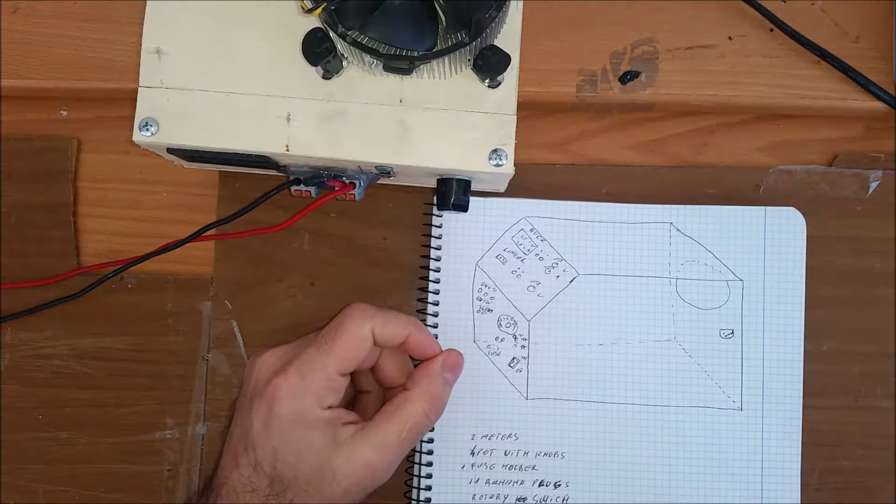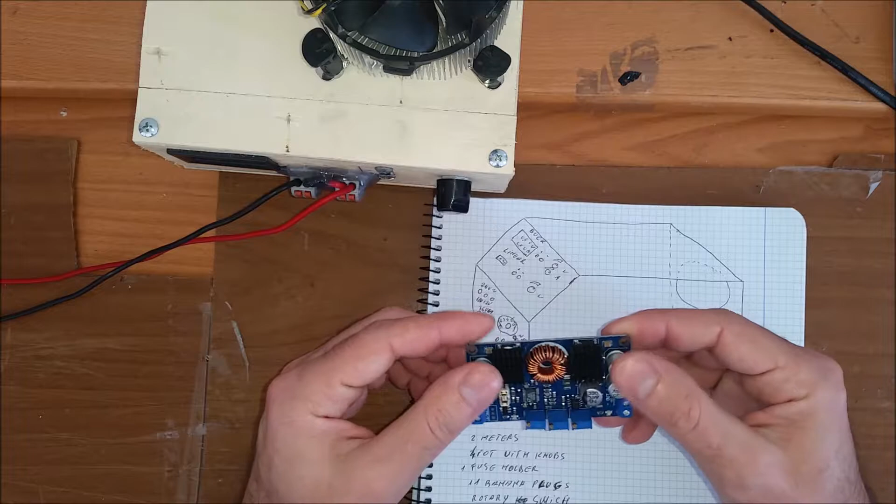It's a bench power supply. This came because I kind of poorly designed this one here, and after that I just bought a buck converter, a step-down step-up buck converter, which will be this one. This is rated at up to 10 amps and continuously 8 amps, so I'm going to include that into my power supply.

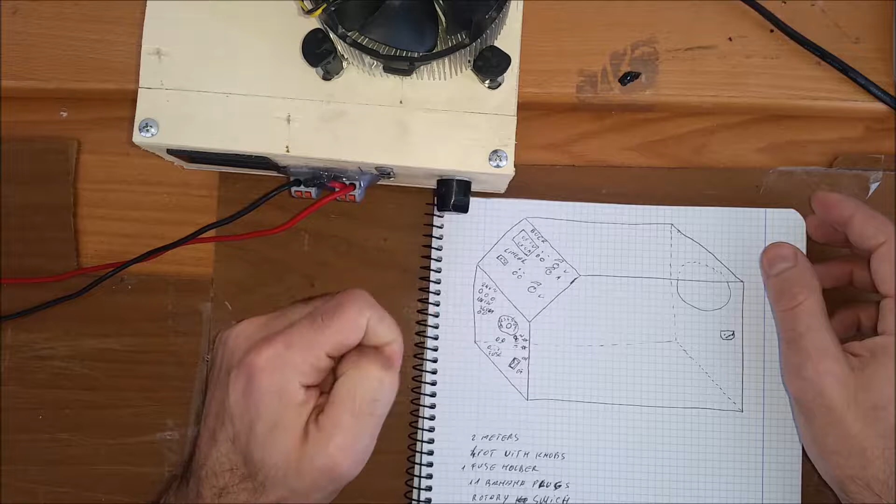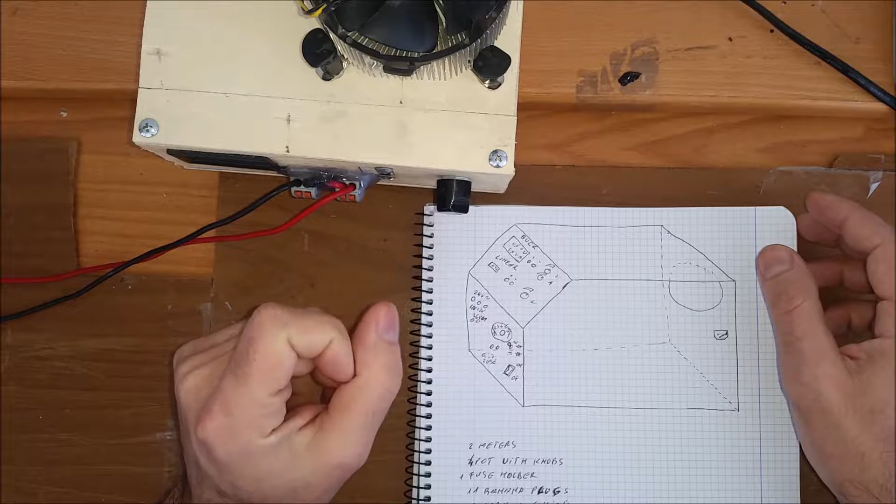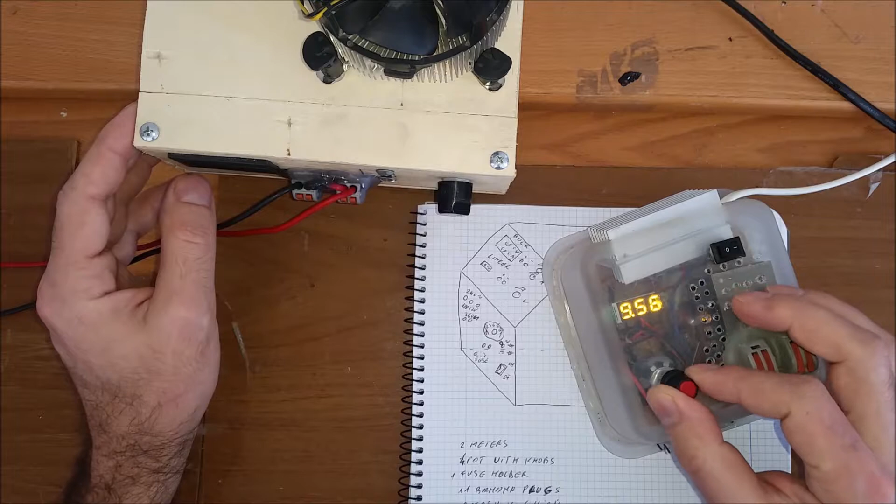And what I'm gonna do more is include a linear power supply and alternating current, or volts, how you want to say it, plug. Now today I'm gonna start by designing the enclosure, because I have more power supplies here. For example, this one, which is a simple LM317 based power supply, and this has the meter on the top part, so I can see this very easily.

Now the other one, which is more powerful, has it at the side, because I've seen people use this type of enclosure for their projects. But this is actually a bad enclosure, because the meter here is under my angle of view, and I always need to bend down to see the values. So if you don't have it on a shelf, on the same line of view as your eyes, this is a bad design for me because I always have this on the table.

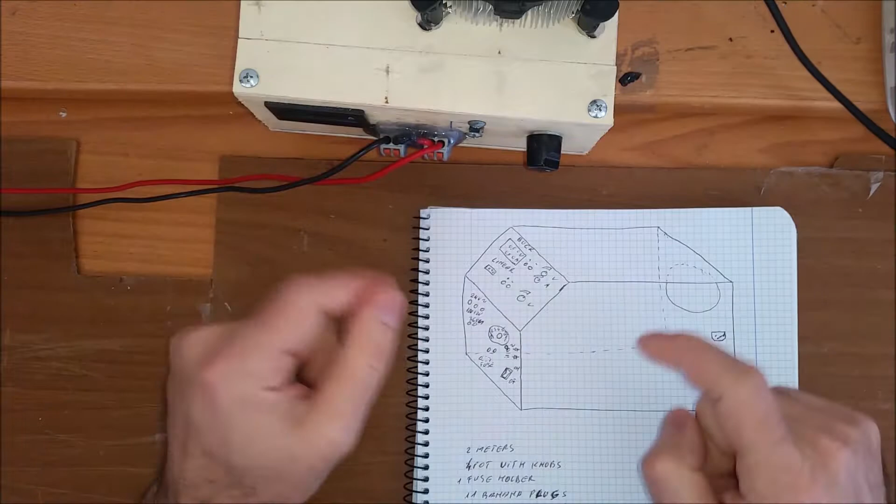More bad design than this is because I made a mistake when I put the power transistor on a simple heatsink, and that simply didn't do the job. And when I put this PC heatsink, I just didn't have enough space in the enclosure, so I put it on the outside. So today I'm going to design an enclosure like this.

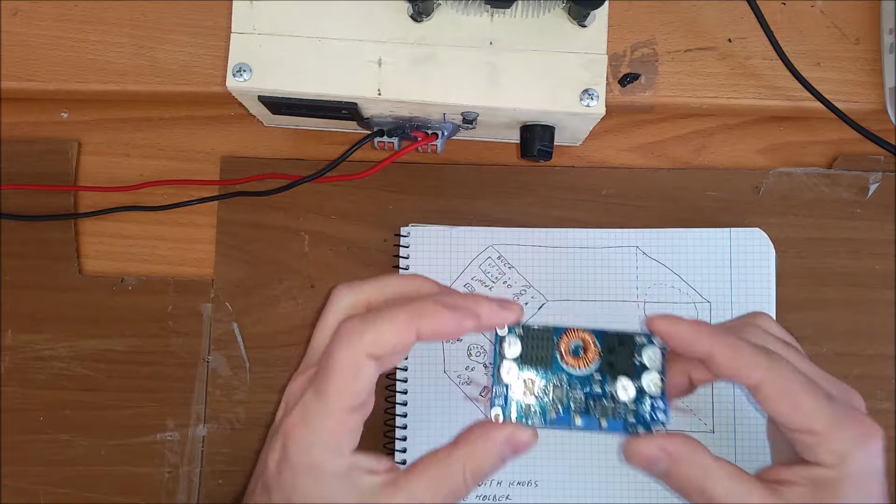I have it designed. I'm just going to take some measurements so I can fit inside the toroidal transformer and the heatsink for the transistor, because I want to put inside this enclosure a buck converter like this, a linear power supply, and a few more features, like 12/24 volts AC, 12/24 DC, 30-something volts AC, and a few alternating current plugs that I have on the transformer rewired.

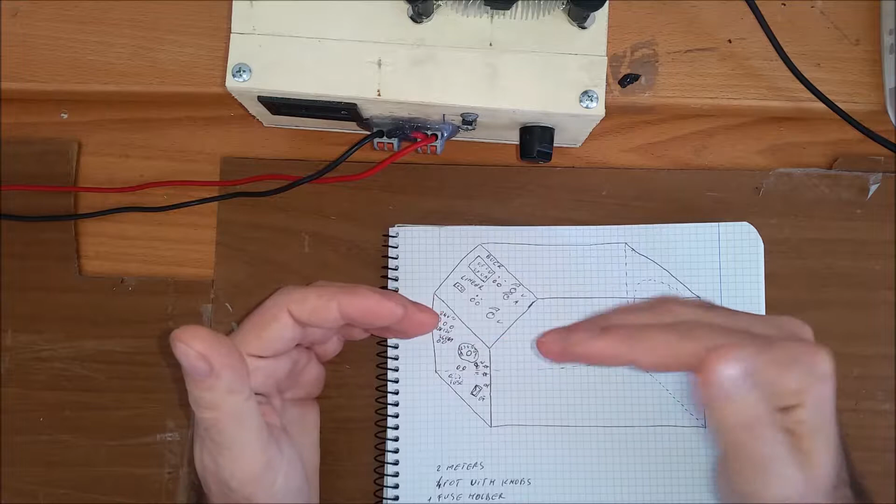So today I'm going to start with the enclosure, and after that I'm going to go from there. Now the enclosure, how I design it, will not be square like this. It will be like a tower, more tall than wide. And the front panel will be from two pieces. First it will be straight down, and the part with the meters will be bent at an angle.

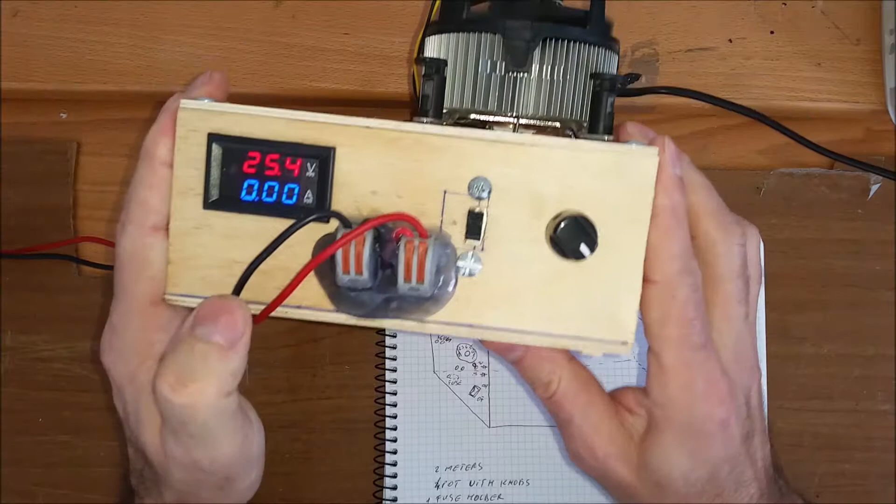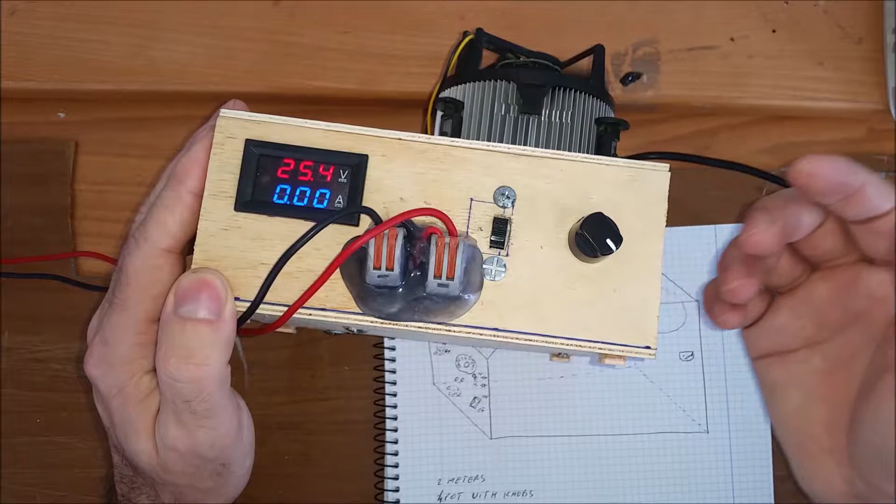That way, when the power supply is on the table, my angle of view will be straight on the gauge that measures my volts and amps, and I will have the knobs there. That way I will not need to bend down to see the values. If I want to shoot a video, you will not see it. For example, right now you will not see the values. I need to put it up like this, and I actually have a video where I put it up, because you don't see it in the camera, and I don't see it myself because it's under my angle of view.

So the front panel will be made from these two panels, and the back enclosure will be closed from the side. Just this side will go out, and I'll have the transformer here. Back here, the big fan with the heatsink will be on top of that, and all other things will be around the enclosure. I didn't think that through yet, so I'm gonna go ahead and start doing that.

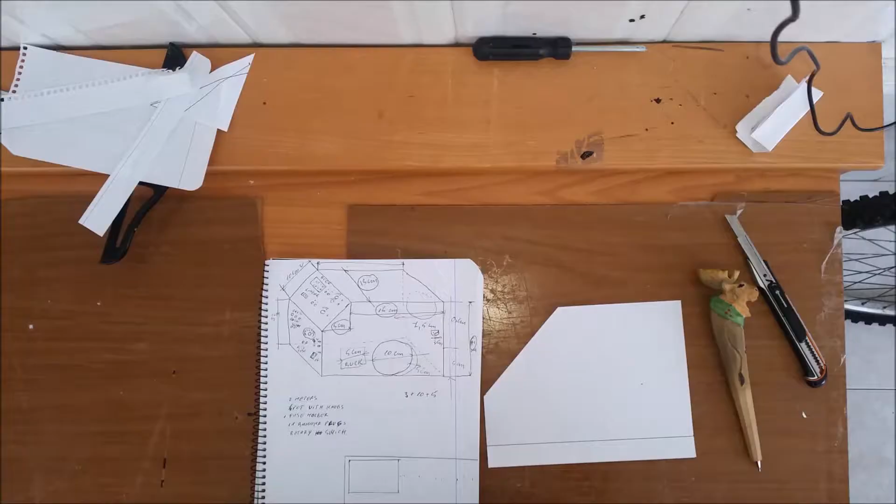Okay, so after some measurements, I end up with this shape, which will be the side of the bench power supply, like this, and it has the measurements. It's 20 by 15 centimeters by 13 wide. So I'm gonna take this right now, put it on the board and cut two plates for the sides.

Okay, so after some time, I have the enclosure. These are the sides, this is the bottom part, it will all be mounted. This is the back part of it. I cut all of this from a sheet of plywood with a coping saw, and here I started to cut the ventilation hole. This will be put in the back of the enclosure.

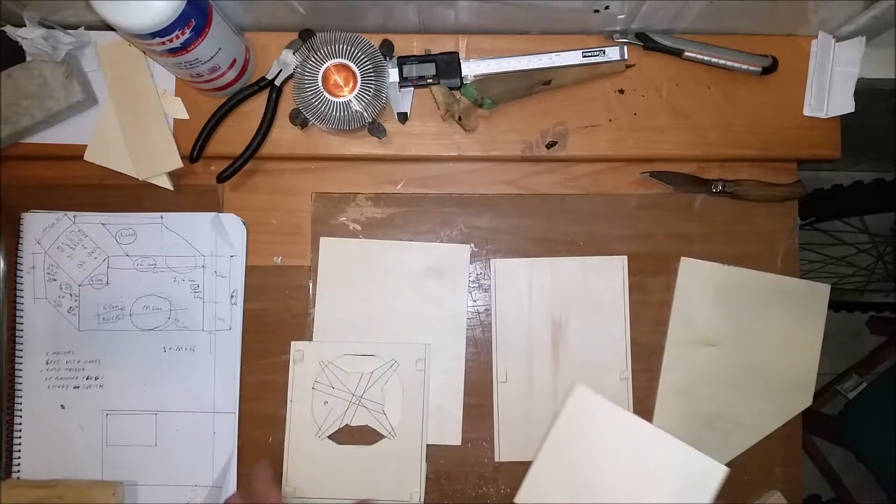This is the front panel, this one here, and this is the back panel, this one here. Okay, this is the front panel lower side, and it will be like this. Put it on, and over that will be this. And on this I'm gonna put the two meters and the knobs for the volts and amperes, and for the volts in case of the linear one.

When I glue this on like this, I'm going to put some kind of support between the lower part and this one here. That way I can take this out, this will stay on, and with the top out I will have full access inside the enclosure.

So yeah, I'm gonna finish what I started by cutting this piece here that was left. I just made a hole inside and with a coping saw I just traced some marks that I made before. I think from the back side it will look just nice.

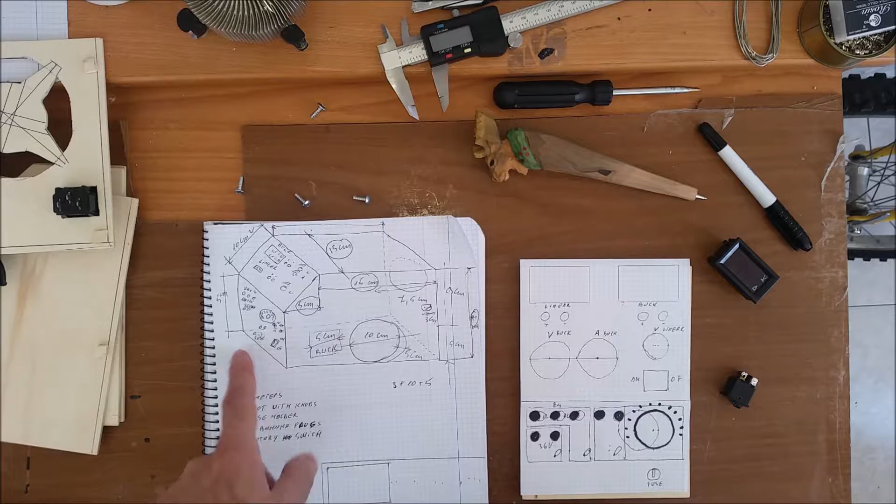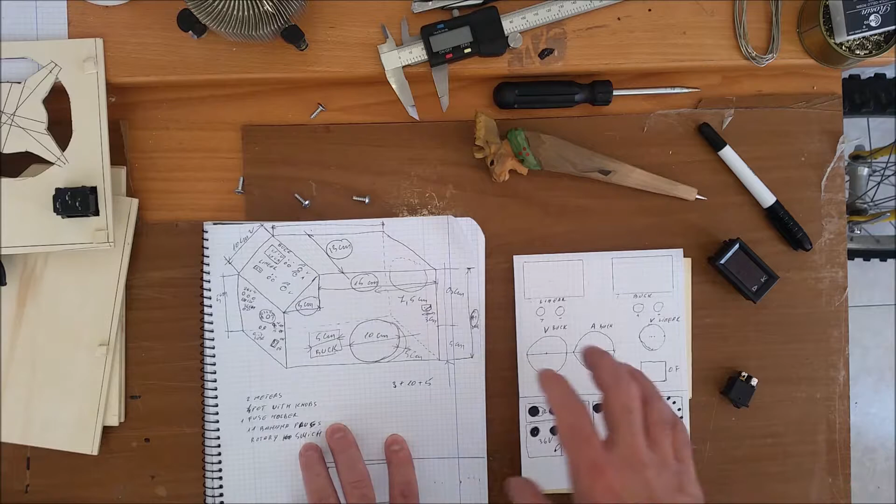So I finished cutting the back plate, which will support the fan for the linear and the plug. It's pretty awesome. And I started to draw the front panel of the power supply. Now, this was more orientative, and I kind of changed some things because these knobs here are very large. I didn't expect them to be that large, but it's okay. It fits on the front panel of the power supply.

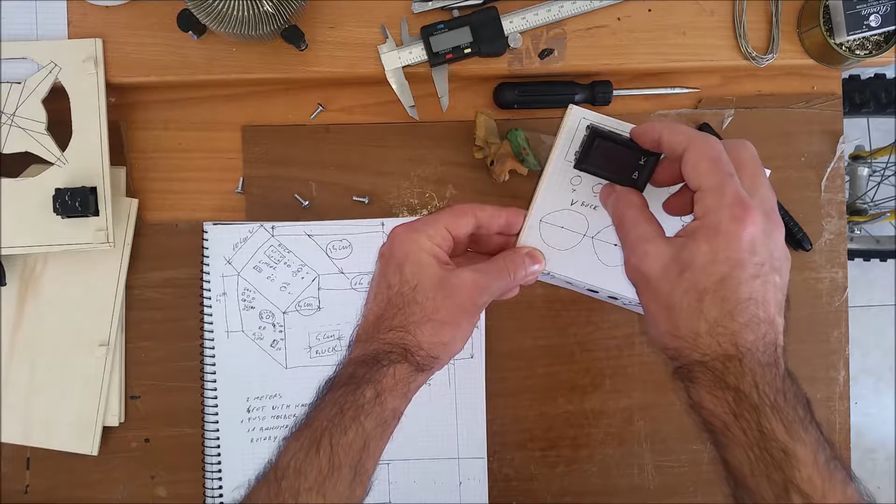This power supply will be at an angle like this. So on the top part I will have the 2 meters. I have this one, and the other one I just ordered from eBay. So this would be here for the buck, and the other one will be for the linear on the right side. After that there will be the banana plugs under this, and the volts adjust and current limit under that.

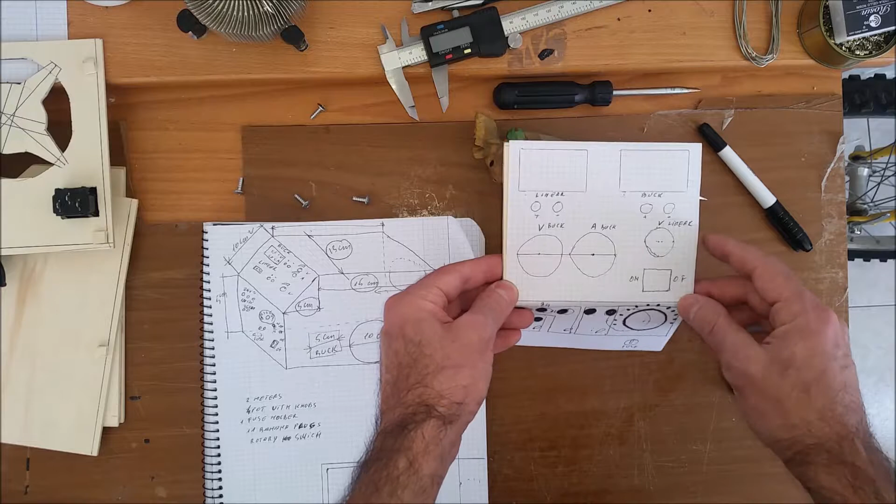And the linear supply, because it's just an LM317, I don't have current limit on it. I'm just going to put the knob that I already have on the other power bench, and 2 banana plugs. And on the lower part, it will be interesting. I decided to put a differential power supply, like 12, and 24 at the ends, with a common ground or common plus, however you want to say it.

And this, with the help of the switch I just put here, it will be 12 common, 12 alternative or minus 12 plus 12 continuous, depending on the switch that I put up or down, and pass it through a linear power supply that will be stabilized.

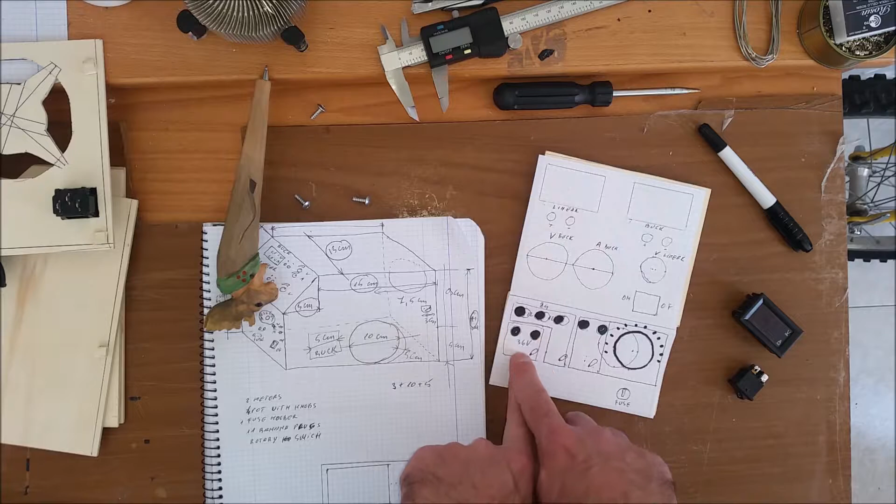Under that, I'm gonna put two more banana plugs that will be straight 36 volts alternative, that will come straight from the transformer. Practically the input that goes into the power supplies, I'm just gonna bring it outside. It will be 36 volts alternative. I put a switch here, alternative or continuous.

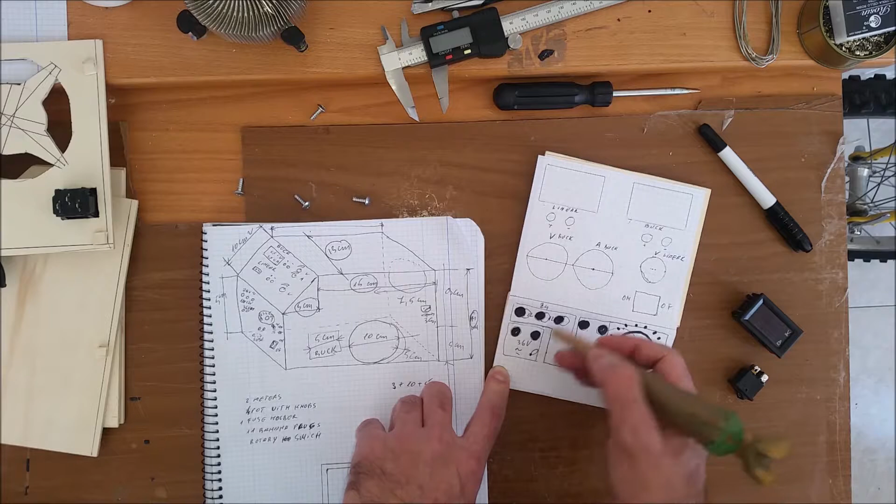I will just put in the rectifier bridge and a condenser, and with a switch put it in alternative or continuous. Now the power supply here will not give me 36 volts, it will give me up to 24 volts. I checked that before. So 36 volts will be like 10 volts over. I don't know what I will use that for, but because I have it, and it will cost me 2 banana plugs and a switch, I'm gonna put it on.

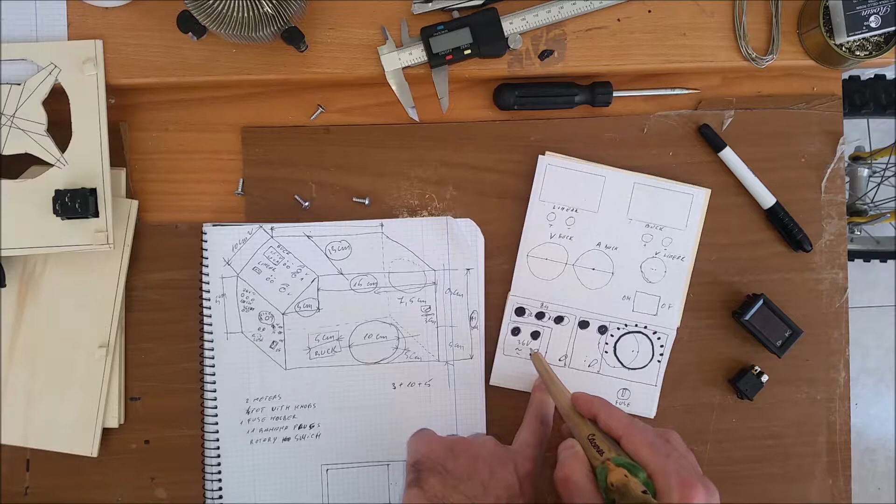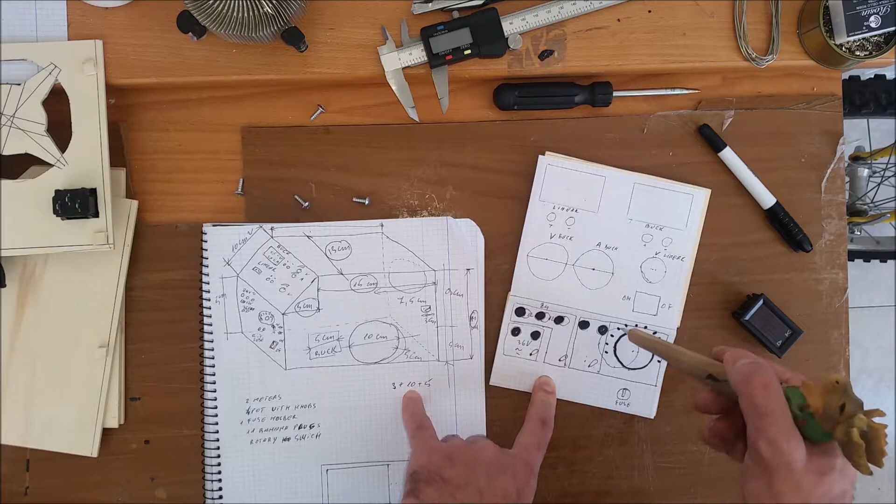Now on this side I'm gonna have other banana connectors. This will be the same wiring and transformer as these two, but 24 volts separate, and this here in between will be a stepper commutator, a switch that will commutate from 2 volts, 2, 4, 6, 8, something like that, until 12 volts. That will be on a separate winding on the transformer. So these 3 here will be separate from each other.

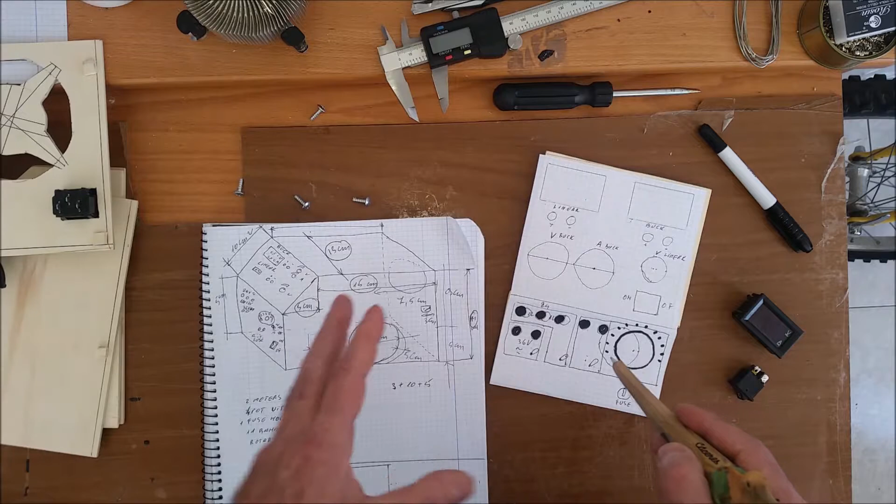And of course each one of them I can change between continuous or alternative current. Now I don't know specifically what this part will help me with, but again, because I can do it, I will do it. And this is all. Right now I'm gonna start and cut the holes for the 2 meters and for the on/off switch, which will be this one, and I'm gonna have it here.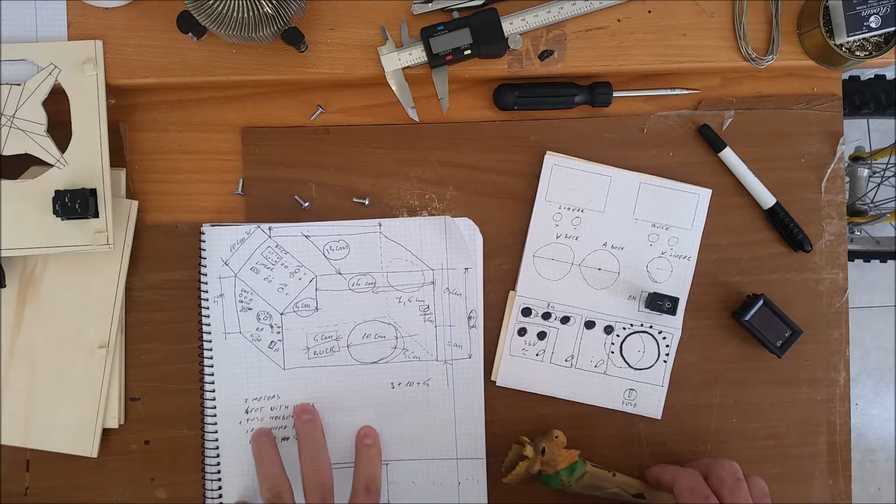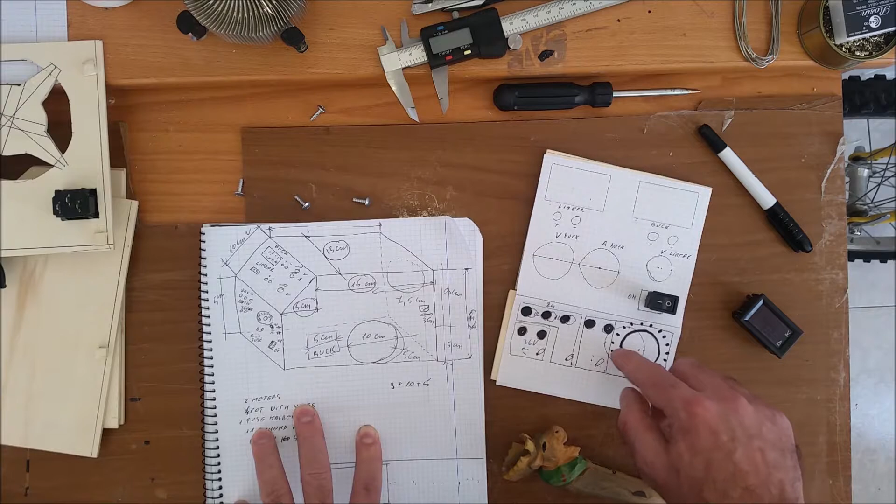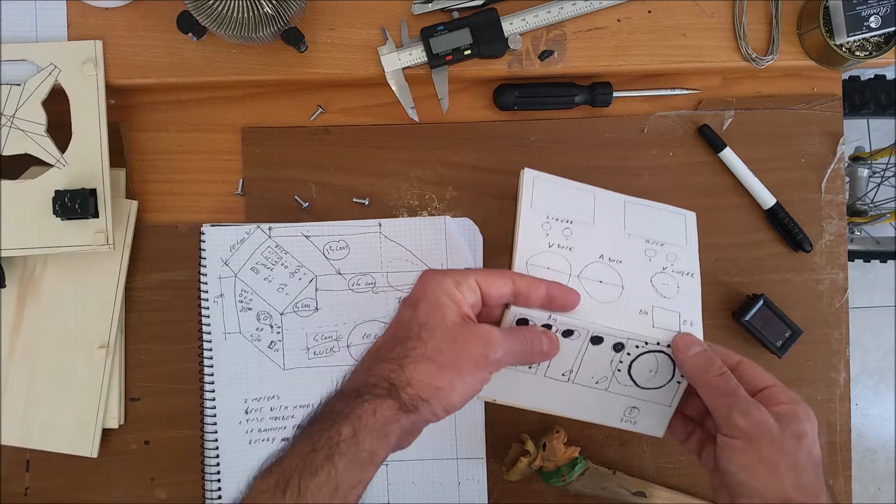Now that's all. I got a fuse here and nothing more. Anyway, if I think of something else, I'm gonna add it or modify later. Probably I'm gonna put this knob here. I'm gonna lower it a little bit, so that when I have the front panel painted and laminated, I will have space to read the volts here. So that's all for now.

Okay, so right now I kind of put together the enclosure. I just put some wood glue there. It's glued there, and this side here on the inside, and the bottom part on the inside. These side panels are not glued, they are designed to come out. So I have the pots put on a separate plate and mounted from behind. That way they will be flush with the enclosure. The knobs will just be level with the enclosure.

And right now the glue is drying. This is the back of the enclosure and this is the front of it. Now I am pretty pleased with how it ended up until now. I will still have banana plugs here for the buck converter and the linear power supply, and in this panel here I'm gonna have a bunch of bananas that will be alternative and continuous current, and I'll have a selector here that will change between the windings of the transformer.